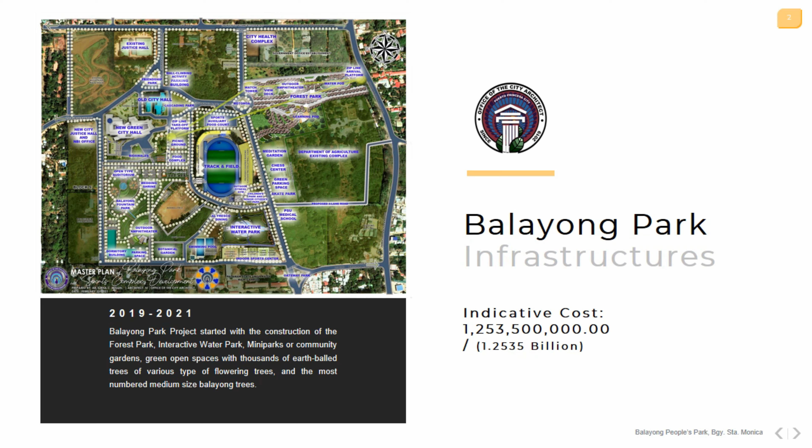First we discuss the Balayong Park infrastructure development, located within the government center of the city. This project started from the construction of the forest park, followed by the interactive water park, and currently construction of mini-parks or additional community gardens, and plenty of green open spaces with thousands of earth-balled flowering trees of various types, but the most numbered of trees planted is the medium-sized Balayong tree. This flagship project earns the enormous part of the infrastructure costs, with a total of almost 1.25 billion.

As you can see, this is the master development plan of Balayong Park with corresponding spaces for the following proposals. Letter A indicates management office. B is the food complex at picnic ground area. C is the restaurants or eateries near the sports complex tower. D is for the grilled restaurants or street food kiosks at Forest Park.

E is the proposed skate park. F is for the senior citizens park. G is the children's park with puppet show stage near the interactive water park. H for youth center. I is the Chess Center. J for multi-story green parking building near the old City Hall. K is Fountain Park at the back of New City Hall.

L is bike trail, bike lane, bike rack and station. M is for yoga center near the recreational garden. N is for the arts and culture exhibit gallery. O for the proposed Zumba park with center.

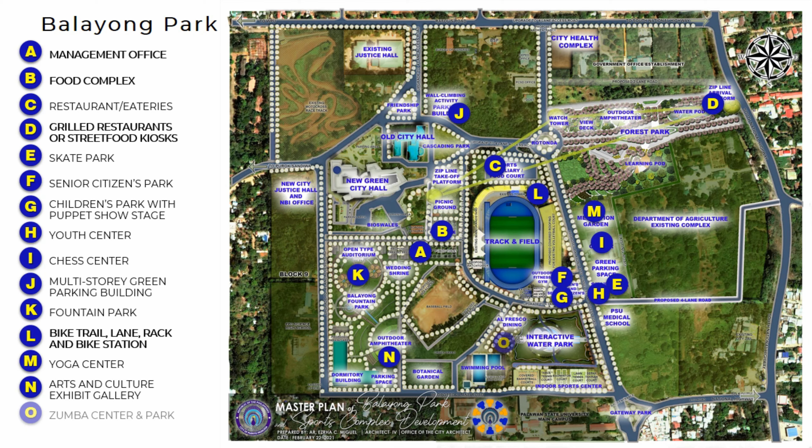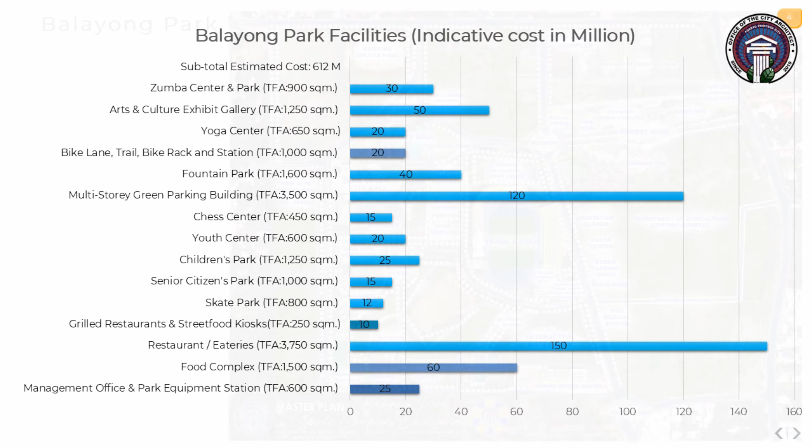Letter P indicates first aid centers. Q is the botanical or herbal garden and flower park. R is the Balayong tree nursery park with greenhouse. S is for mixed-use building to be composed of offices, function or convention halls, as well as commercial kiosks. T is the proposed sanitation booth at entry points.

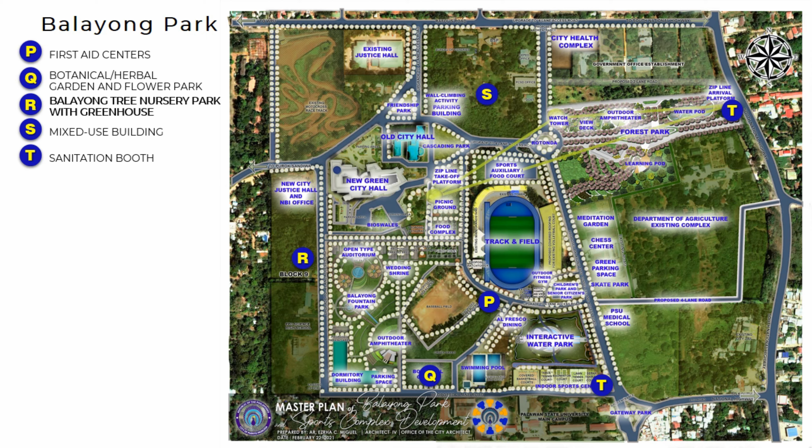U is for the police or security outpost. V is the canopy walk, elevated boardwalk and bridges. W for watchtower completion, which is composed of food kiosks in the central part of the tower. X is the zipline or spiral tower. Y for ecumenical wedding shrine. Z is for wall climbing or rappelling area.

A is for sports complex control and watch tower. B is for elevated tree planters near the recreational garden. C is for the forest parking space at the back of Forest Park. And lastly, D for the proposed wheelchair, stroller and electronic jeepney station.

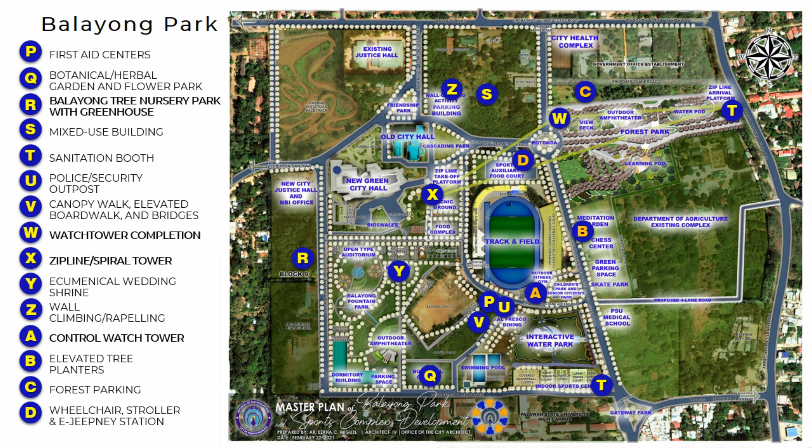To further understand the functions and future designs of the facilities, these are the conceptual designs and inspirational images. To begin with is the Balayong Park Management Office with clinic and park equipment station, having a total floor area of 600 square meter with an estimated cost of 25 million.

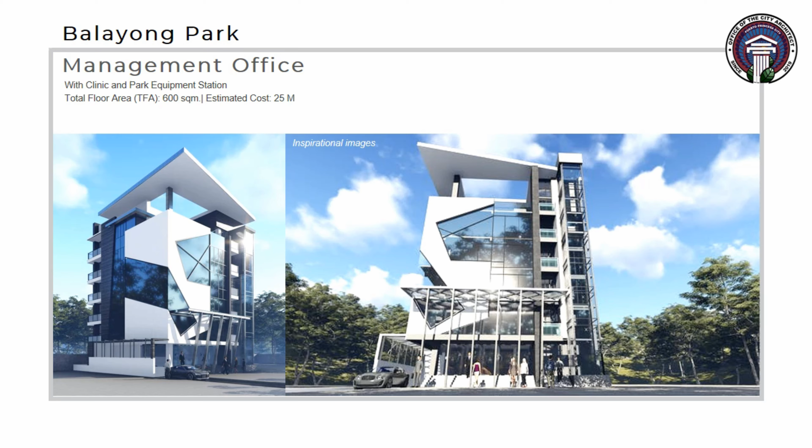With regards to food establishments at the Balayong Park, these are the inspirational images of the proposed food complex, located at the picnic park near New City Hall, having a total floor area of 1,500 square meter, with an estimated cost of 60 million.

Next is the proposed restaurant or cafeteria, located at the back of the sports complex existing tower, having a total floor area of 3,750 square meter, with an estimated cost of 150 million.

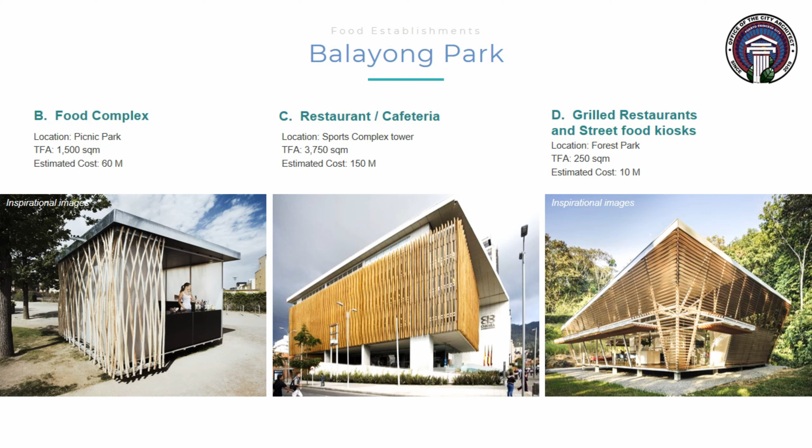Lastly, the proposed grilled restaurant or street food kiosks, located at Forest Park, having a total floor area of 250 square meter, with an estimated cost of 10 million.

For leisure activities, the Balayong Park intends to provide a fountain park at the back of the new Green City Hall, opposite the Sanggunian office, with a total floor area of 1,600 square meter, with an estimated cost of 40 million.

And due to public demand, especially for bikers, the park is also proposing bike lane, bike trail, park, bike racks, and bike station, with a total floor area of 1,000 square meter and an estimated cost of 20 million.

And thirdly, the proposed yoga center, to be located near the meditation garden, with a total floor area of 650 square meter and an estimated cost of 20 million.

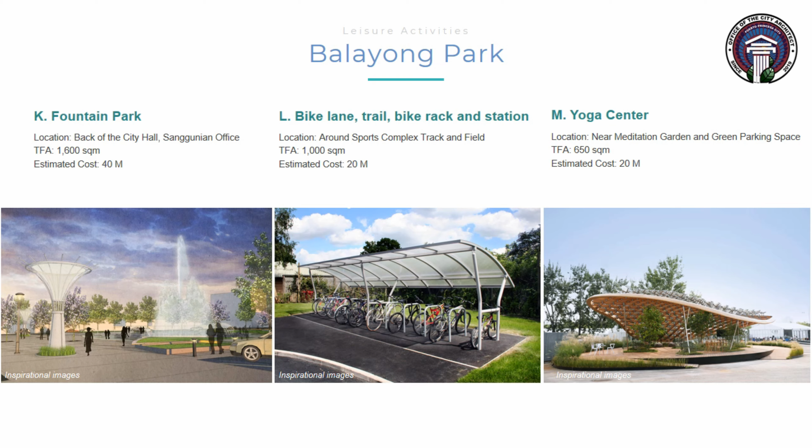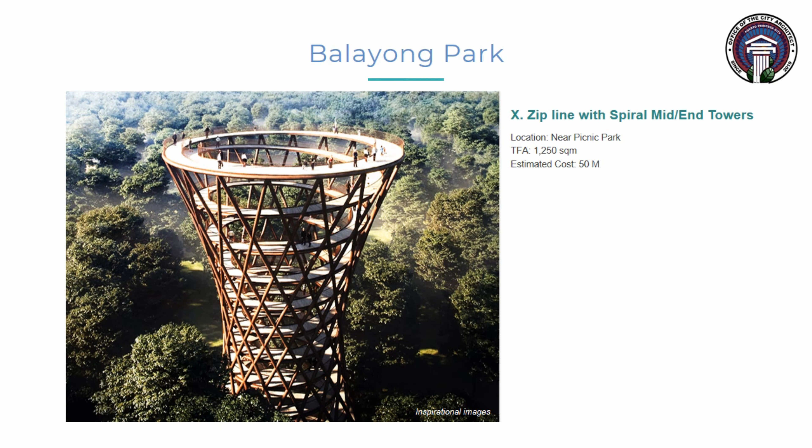This zipline with spiral tower consists of 3 stations, starting with the picnic area and ending at the forest park near the National Highway, with a total floor area of 1,250 square meter and an estimated cost of 50 million.

This 4-story watchtower is to be completed with a food stall for refreshments of the visitors. This project is initially constructed within the forest park, with additional spaces at the central part of the tower having a floor area of 120 square meter and an estimated cost of 4.5 million.

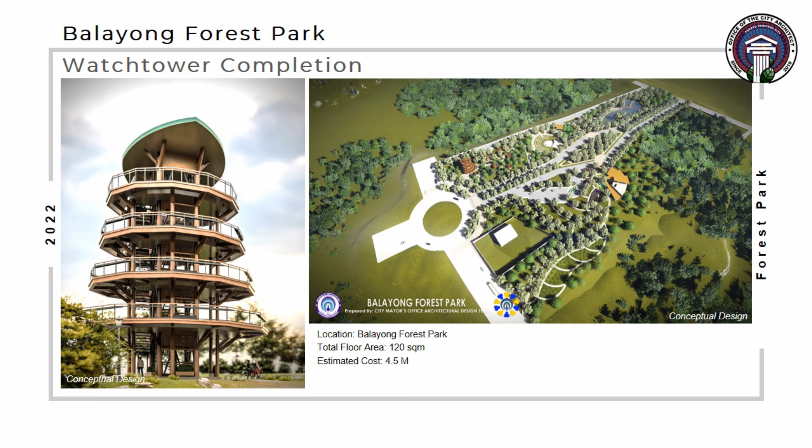The proposed sports complex control and watchtower, conceptualized by the Office of the City Architect, is 570 square meters in floor area and almost 20 million estimated cost.

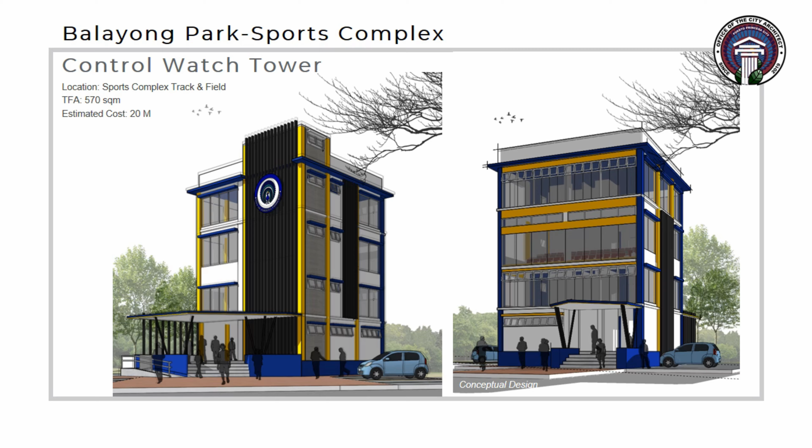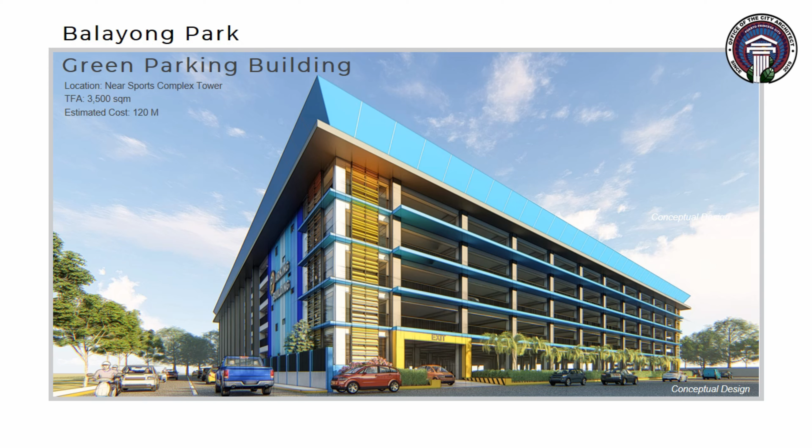To provide additional parking space for the growing number of private vehicles and visitors of the park, the proposed green parking building, located at the back of Sports Complex Tower, has a total floor area of 3,500 square meters and an estimated cost of 120 million.

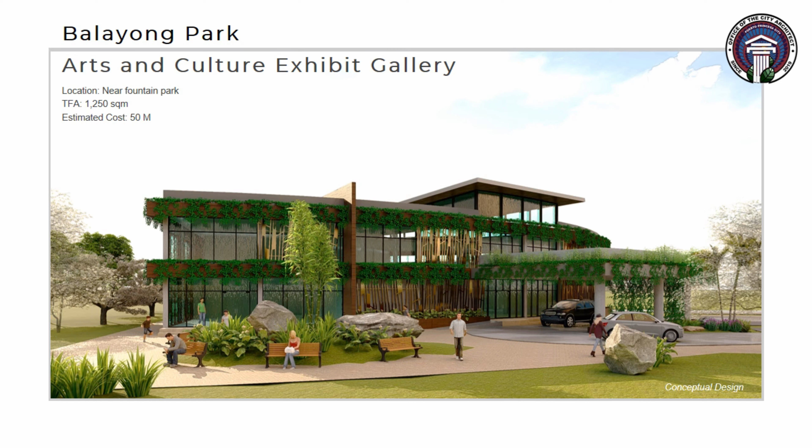To promote the culture and arts of the local artists of the city, this proposed arts and culture exhibit gallery is to be located near the proposed fountain park, with a total floor area of 1,250 square meters and estimated cost of 50 million.

The proposed new City Justice Hall and NBI office is one of the ambitious projects of the city government, with a total floor area of 30,000 square meters and an estimated cost of 800 million, to be located at the old NBI compound, near the City Sanggunian office.

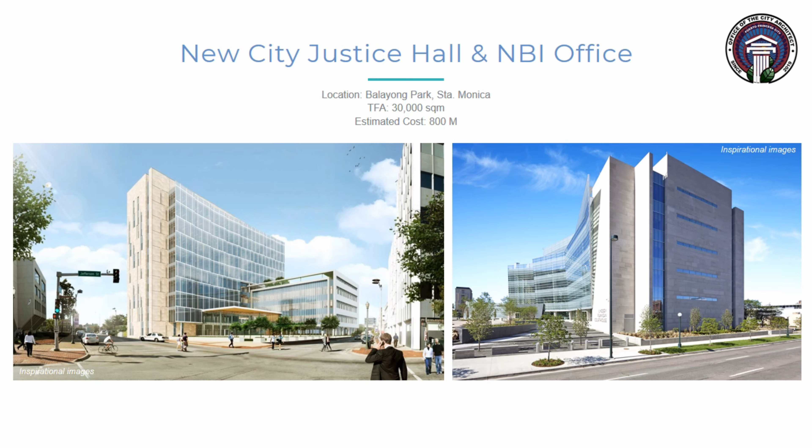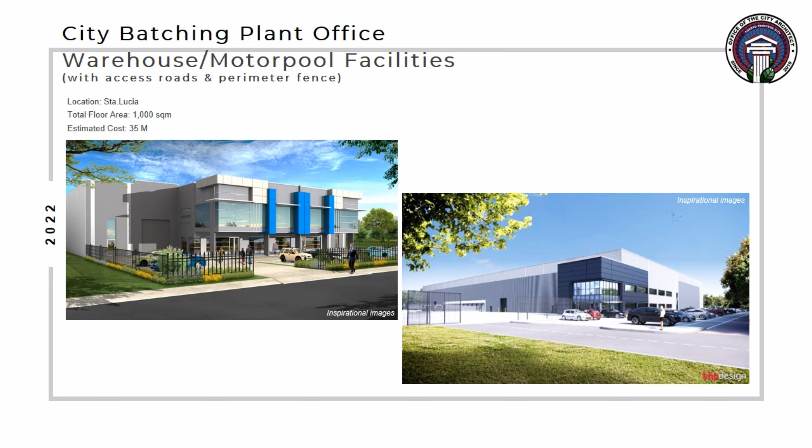Moving on to the City Integrated Agricultural Center at Barangay Irawan, proposed huge projects such as halal slaughterhouse and cold storage facility.

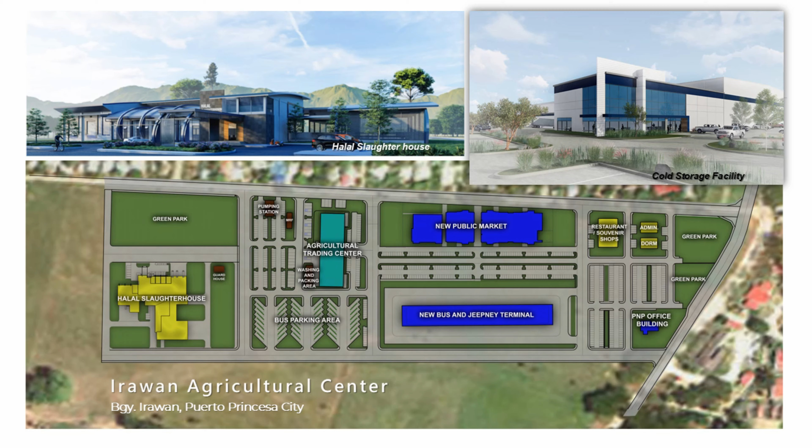First is the halal slaughterhouse and facilities, with 4,000 square meter floor area of development, having an estimated cost of 180 million.

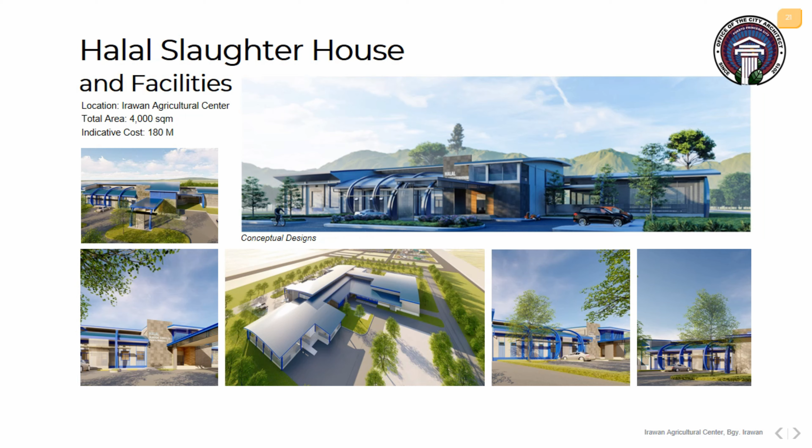Next is the proposed restaurant and souvenir shops, near the public market of the Agri Center, having a total floor area of 1,500 square meters and estimated cost of 60 million.

Next building is the admin and dormitory, having a total floor area of 430 square meters and an estimated cost of 15 million.

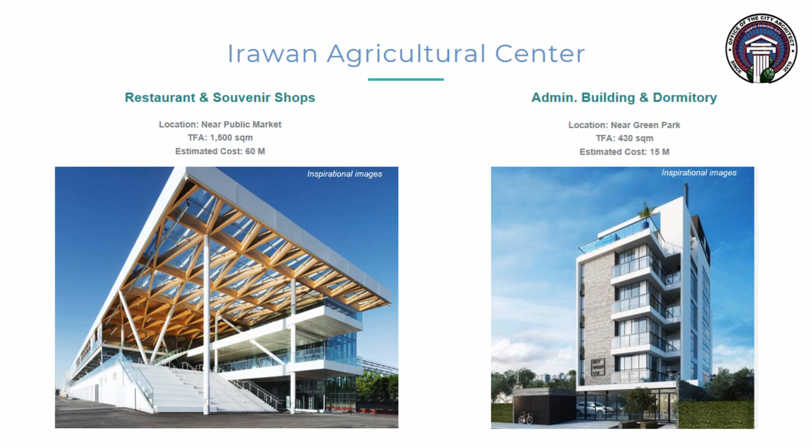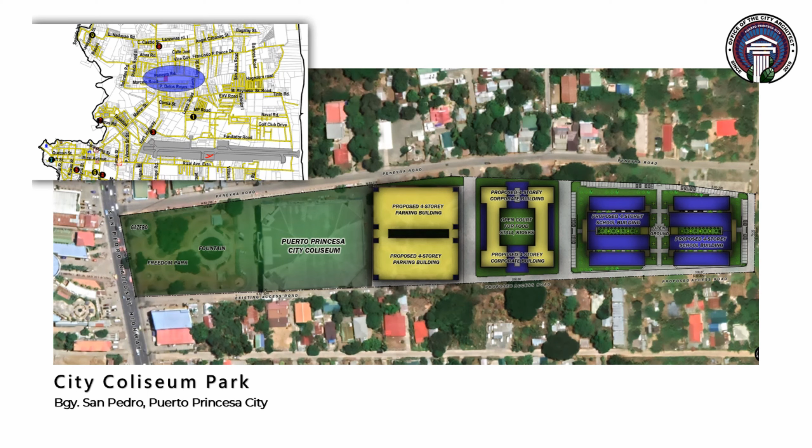Next improvement of the city is the existing Coliseum area at Barangay San Pedro. This map shows the proposed school building, IT hub and steel parking building.

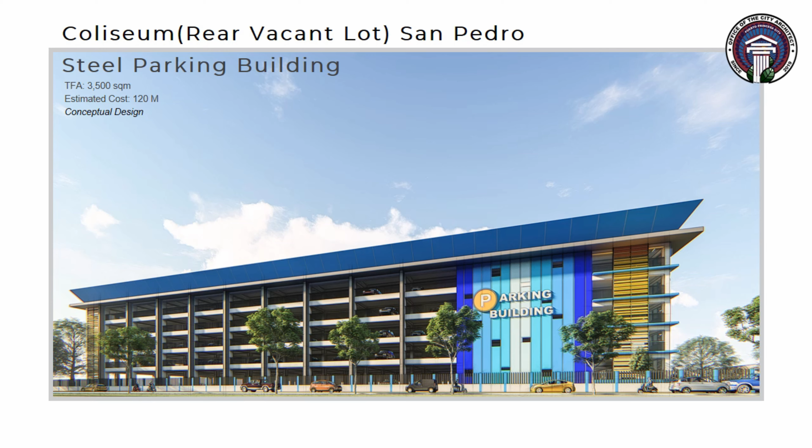Starting with the proposed steel parking building, with a total floor area of 3,500 square meters and an estimated cost of 120 million. Next is the IT hub or BPLO building, with 5,000 square meter total floor area and estimated cost of 200 million.

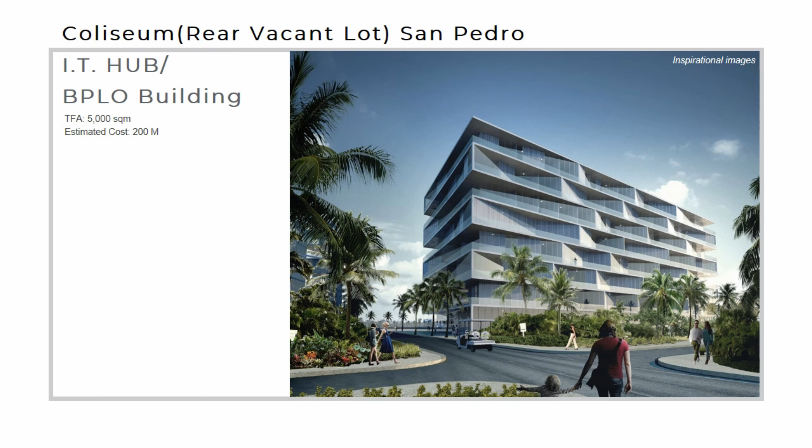And lastly, the city elementary school to be constructed with a total floor area of 8,750 square meters and an estimated cost of 350 million.

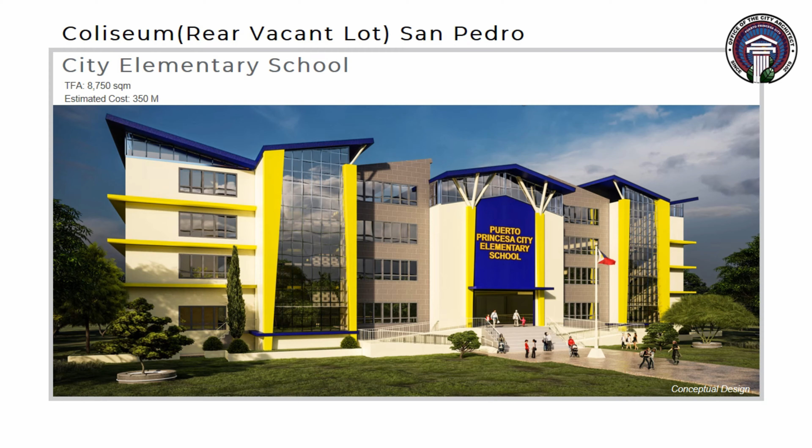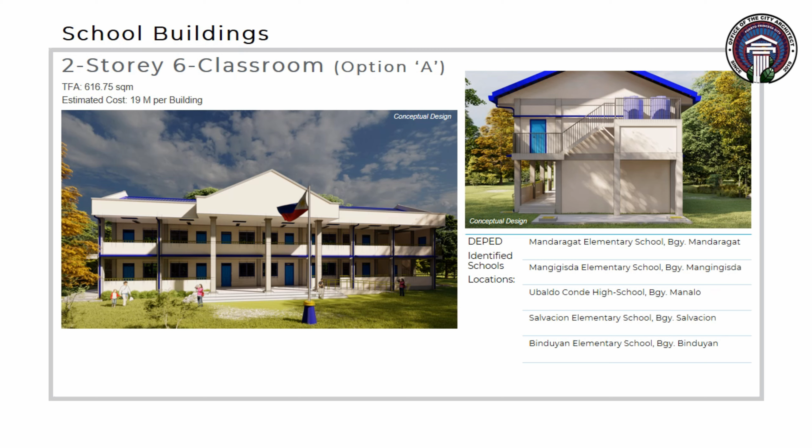The 5 schools are the following. This scheme is option A. Next is the 2-story 6-classroom school building, option B.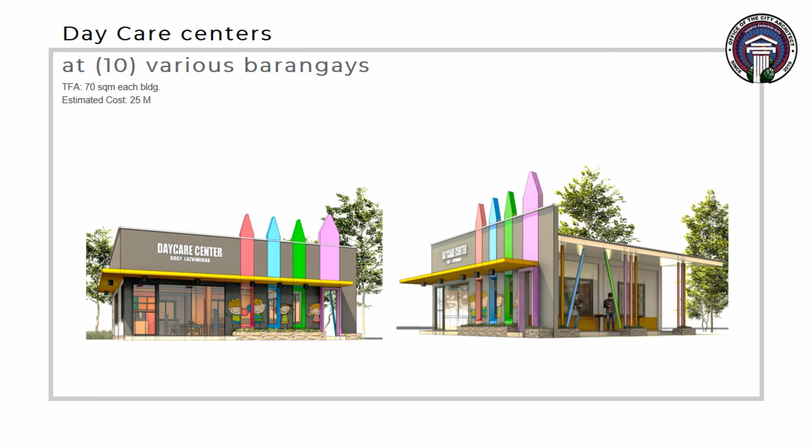For the nature park experience with partnerships from the barangay community through this community-based tourism project is the establishment of the Acacia Tree Tunnel Park, located at Barangay Inagawan, with initial facilities to be constructed.

The following buildings are: the Administration Building, 154 square meters with an estimated cost of 6 million. Secondly, the Pavilion, 224 square meters with an estimated cost of 8 million.

Third is the Rentable Kiosks, 102 square meters with estimated cost of 4 million. Fourth is the Souvenir Shops, 132 square meters with estimated cost of 5 million. And lastly, the Public Toilet with 74 square meter floor area and estimated cost of 2.8 million.

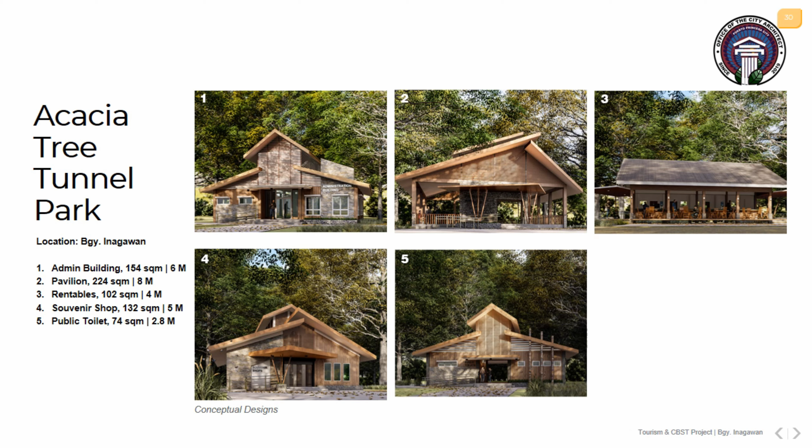To provide better health care services to the citizens of the city, the completion of City Health Complex is urgently needed. This project, estimated cost of 250 million and a total floor area of 9,500 square meters, will house the outpatient department as well as the offices of the city health frontliners.

Next is the General Services Office warehouse expansion. Due to insufficient space from a small office, it is timely to construct a warehouse to safely store all the equipment, machineries and supplies of the city government offices.

The location of the building is inside the City Engineering Department motorpool at Barangay Santa Monica, with a total floor area of 286 square meters and an estimated cost of 10 million.

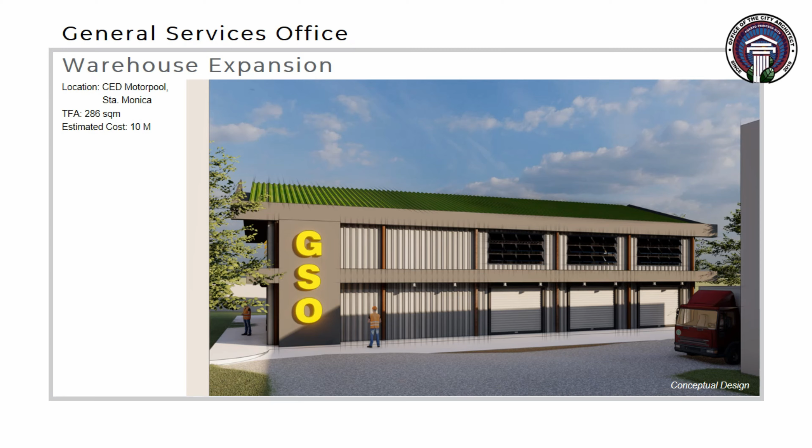A project initiative of the City Veterinarian Office is the proposed cold storage facility at the old city slaughterhouse at Barangay Tagbiras, with an estimated cost of 30 million and a total floor area of 860 square meters.

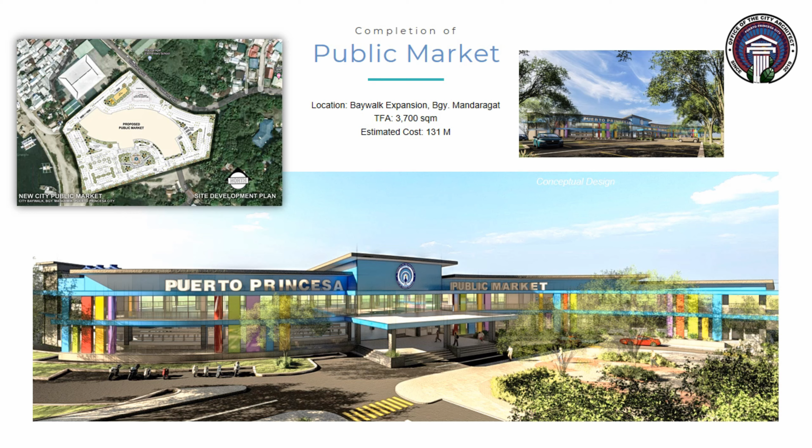In the urgency of public service to our community's food provision and support to our fellow market merchants is the completion of public market at Baywalk, with a total floor area of 3,700 square meters, to be completed at an estimated cost of 131 million.

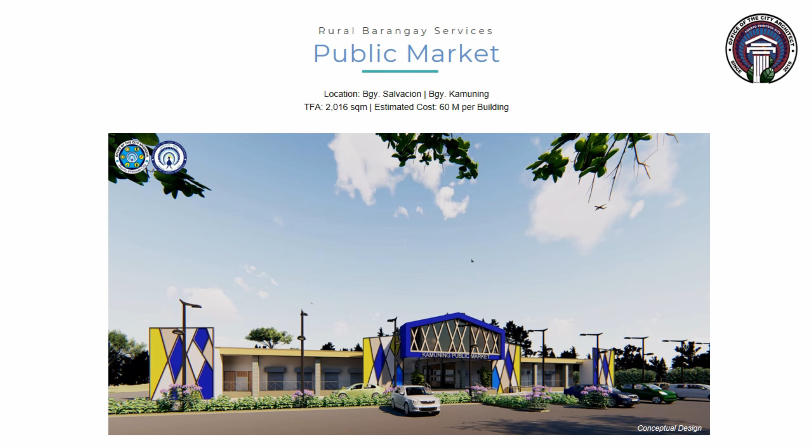Aside from urban markets, the establishment of public markets on rural barangays is also proposed to provide services to rural barangay consumers. These 2 public markets are to be located at Barangay Kamuning in the southern part of the city and Barangay Salvacion for northern barangays, having a total floor area of 2,016 square meters and an estimated cost of 60 million per building.

The proposed public terminals on various rural barangays are also needed to support our public commuters. This building has a total floor area of 1,875 square meters and an estimated cost of 75 million per building.

Also, one of the most constructed buildings found in every barangay is the covered gym or evacuation center with toilet, to be funded with 40 million. Each covered gym has 520 square meters total floor area.

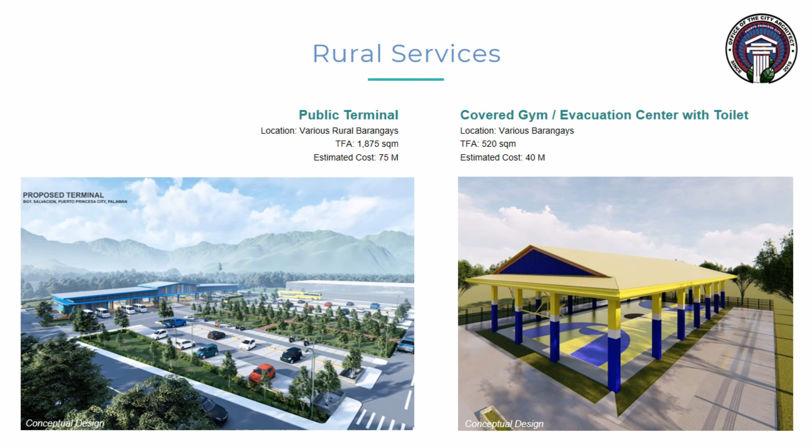These are the top 30 infrastructure projects for the fiscal year of 2022. Beginning with Bayron Park facilities, first is the Management Office with clinic and park equipment station, with 25 million cost.

Next is the Food Complex with 60 million cost, grilled seafood restaurants and street food kiosks with 10 million cost, Bike Trail Park, Bike Lane, Bike Rack and Bike Station with 20 million cost, Bayron Tree Nursery Park with greenhouse with 15 million cost, and the Watchtower completion having 4.5 million cost.

Next is the Control and Watch Tower at Sports Complex, with 20 million cost. Next is the proposed zipline with spiral mid-end towers with 50 million cost.

Also the completion of City Health Complex with an indicative cost of 250 million, and the City Peso Manpower Development Center with almost 20 million cost. The subtotal for these 10 items is 474.5 million.

Moving on to the development of the City Integrated Agricultural Center, the Halal Slaughterhouse and facilities with 180 million cost. Next is the restaurant and souvenir shops at the Agri Center, also with 60 million cost, and the administration building having a cost of 15 million.

Through the Special Education Fund is the City DepEd school building project, preferably a 2-story 6-classroom school building to be constructed on these 5 school campuses, with a budget of 19 million each.